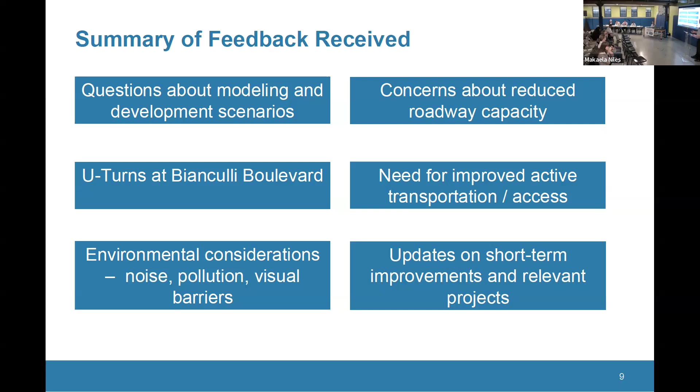Leading with this slide at the beginning instead of at the end is almost like a next step slide. The reason I wanted to show it is that tonight's meeting, so the last meeting, we had a lot of alternatives development. We showed a lot of different concepts and heard a lot of feedback. As part of that feedback, our next step in the study process is to take those alternatives and test them.

That is what we're calling our preliminary transportation operations analysis. We have to look at the alternatives and say, do they function well or not? Our next meeting is going to be the alternatives analysis. We could call it final analysis, but it's definitely going to dig deeper into things people are providing feedback about: environmental, visual, air quality, safety, environmental justice, public health, things like that. Once we're able to set some of our alternatives through the development process, we can continue our analysis.

Bear with me, there's a little bit of a lag. It seems to have possibly frozen, but okay.

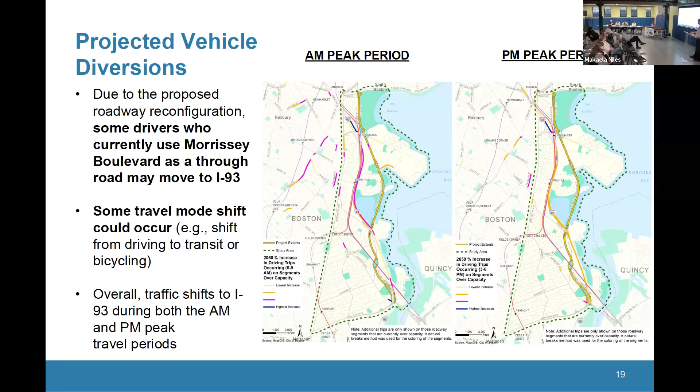Again, back to feedback: what would happen capacity-wise, or diversions. With Morrissey reconfigured to primarily a four-lane cross-section, two north, two south, not at intersections obviously, some of the drivers that currently use Morrissey as a pass-through may move to 93. There's definitely a primarily a shift to 93. There are shifts to other facilities, but the model shows that there would be a major shift back to 93 from Morrissey for drivers. There could definitely be some mode shift based on the numbers we showed on the prior slide with increase in transit mode share, but not unexpectedly, the assumption is they would be diverted back to 93.

So we're getting to the point with all this build model, like, what do we do with it? What's the purpose of it?

So again, once we have this information that comes out of the model, we have to test the alternatives through simulation software.

So we test initially using a software called Synchro. Synchro and Vissim - Synchro is a higher level intersection testing software. It's less data intensive, but we wanted to use it to bring the alternatives we've shown in prior meetings through what we call a fatal flaw analysis. Essentially, operationally, if they don't function well at all, we want to know that.

The synchro testing also allows the traffic engineers to tweak and modify the intersections to see if they could get them to function better, whether it be a longer left turn lane. There are various ways that they can test things.

One thing I want to note is that we've shown a lot of alternatives in the past. At meeting 3.5, we heard a lot of feedback on likes and dislikes. We are showing all of the alternatives we've developed tonight, because we're taking all the feedback from all the meetings into our final analysis. We're testing all the alternatives, showing them so we can show you how they function, because it's very possible that some of your likes and dislikes might be tied to function and operational analysis. We just want to give as much information as possible.

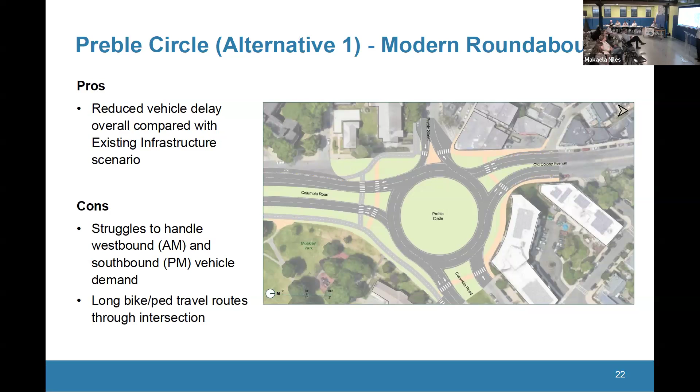One of the pros of this concept is reduced delay compared with the circle that's there now. Some of the cons, though - we found that the westbound Columbia Road and southbound Old Colony Avenue approaches struggled to handle the future volume we were projecting for 2050. Also, because it's still a circle, pedestrians still have long travel routes to get from one side of the intersection to another.

Our second alternative at Preble Circle was to signalize the intersection. This performed more efficiently than the roundabout. There would be crosswalks provided across each leg of the intersection, mostly separated from turning traffic by signal phasing. One exception would be the crosswalk across Preble Street, which would go concurrently with southbound right turns off of Old Colony Avenue, because that turning volume is relatively low.

Another pro of this option compared to the roundabout is that crossing distances would be shorter. It's a much smaller footprint than the roundabout, so it would open up some additional space for active transportation and placemaking opportunities. Some of the cons we found here: the northbound left turn had some delay in the afternoon peak hour, and it may take a couple of cycles to make that movement. Also, the southbound through movement backed up a bit in the PM.

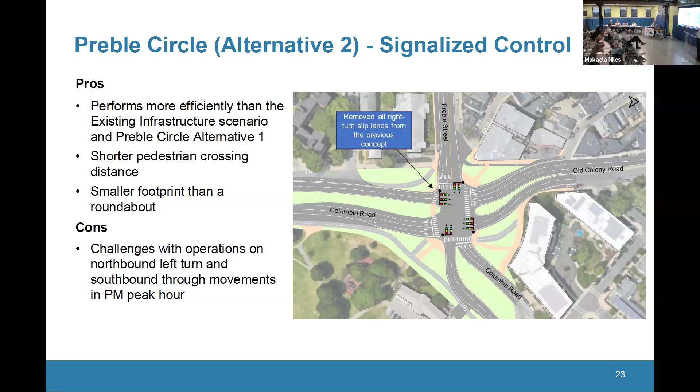Our next location is First Street, which does not exist today. This will be a new roadway proposed as part of the redevelopment of 2 Morrissey Boulevard, connecting from Mount Vernon Street down to Morrissey, between K Circle and Bianculli Boulevard. It would also connect at the entrance opposite the 3575 Morrissey Boulevard development.

The first option we looked at here is keeping the roadway essentially as it is today. The driveways to those developments would be right-in, right-out off of the service roads with no cross connection. So the pro, obviously, is we don't interrupt flow on Morrissey Boulevard—it continues unimpeded. The con: we don't introduce any new east-west pedestrian or vehicular connectivity with this concept.

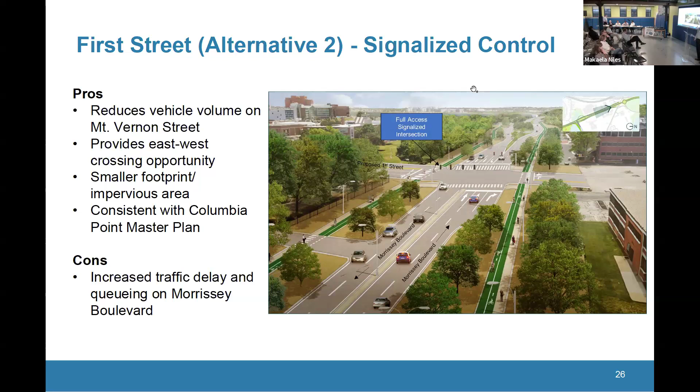The next location is Bianculli Boulevard. The first option we looked at was based on the 2017 DCR concept for the corridor, with some minor tweaks to lane configurations to handle our projected 2050 volumes. This concept would terminate the southbound service road near the South Line building at a signal, and Morrissey Boulevard southbound would continue as the main roadway. The movements—the turn into Bianculli Boulevard and the U-turn that currently happen off the service road—would happen as a U-turn or left turn from Morrissey southbound.

So the biggest change from existing conditions, besides the reduction to two lanes each way on Morrissey: pros here, we found strong overall traffic operations in the peak hours, and we can add pedestrian and bicycle crossings on all legs of the intersection, so really good connectivity. Out of all our alternatives, this had the smallest footprint and the least amount of impervious surface. Cons here, the southbound U-turn movement in the morning was pretty heavy, and it may take a couple of cycles to get through this signal.

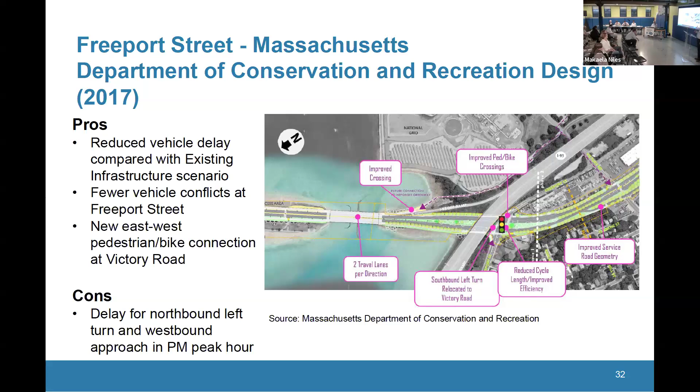Second alternative that we looked at here - we're calling it alternative 1, since it's not the DCR concept - would be another median U-turn concept. This would eliminate all left turns at the Freeport Street intersection and relocate them to new median U-turns to the north and to the south.

Pros for this concept: again, reduced delay compared with the future volumes on the existing corridor, and even fewer vehicle conflicts at Freeport Street compared to the DCR concept, because all left turns would be taken out of the intersection. Cons for this option would be more total delay than the other alternatives, because again, now we're introducing two new signals for each U-turn to the north and south.

The median U-turns themselves require a larger footprint and more impervious surface, so it makes it less environmentally friendly and less friendly for pedestrian and bike connections. They would have to go around those bulb-outs for U-turns. And this would keep the Victory Road intersection essentially as it is now, just a stop control on the service road with no new east-west pedestrian connection at that location.

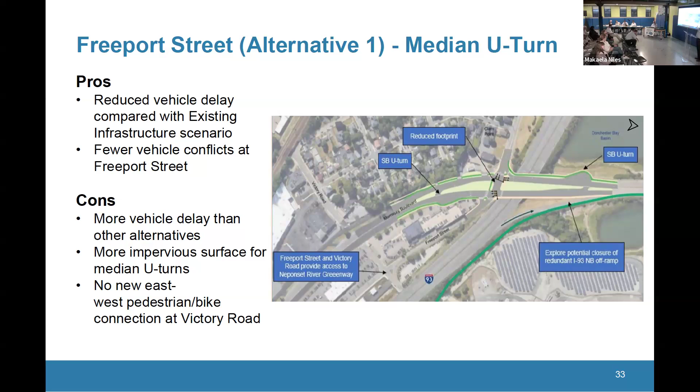The next alternative is using Victory Road and Freeport Street as a quadrant roadway. This is very similar to the DCR concept, except all northbound and southbound left turns are eliminated at the Freeport Street intersection. The southbound left turn is relocated to Victory Road, just like in the DCR concept. For the northbound left turn, you would make a right turn onto Victory Road and then a left onto Freeport Street.

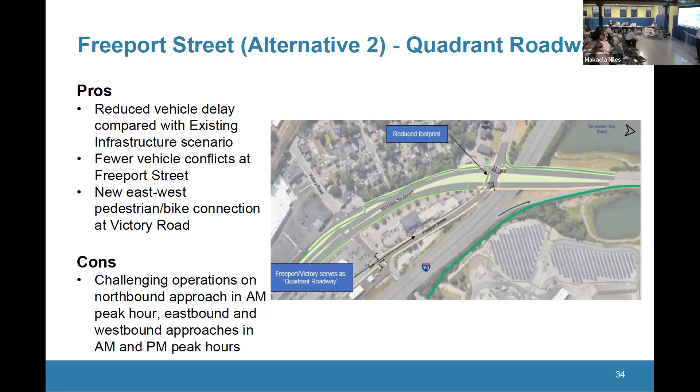Pros for this concept: reduced delay compared with leaving the existing infrastructure in place, and reduced vehicle conflicts at Freeport Street because of the elimination of those left turns. This also provides the east-west crosswalk at Victory Road like the DCR concept. Cons we found: operations were challenging northbound along Morrissey Boulevard in the morning, and the eastbound and westbound Freeport Street approaches had some backups in both the morning and afternoon peak hour.

The final alternative we looked at for Freeport and Victory would be a full signalized intersection at Victory Road, eliminating the southbound service road and connecting Victory Road across Morrissey into the neighborhood. Pros with this concept would be new east-west pedestrian, bicycle, and vehicular connections between Victory Road to the east and the neighborhood. We'd also have new access from I-93 directly to the neighborhood via Victory Road instead of going around via Freeport Street.

We would eliminate the southbound service road, reducing impervious surface and freeing up space for active transportation and placemaking, while reducing conflicts at the Freeport Street intersection since those left turns would be prohibited and movements would occur via Victory Road instead. The cons here: Freeport Street eastbound still has some backups in the PM peak hour, and southbound Morrissey Boulevard also had some challenging operations in the PM peak.

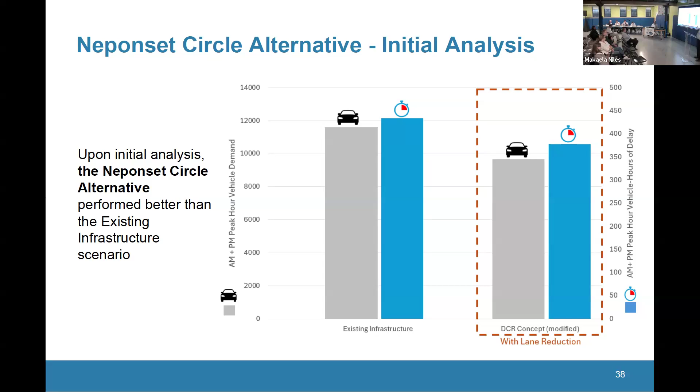Okay, so just to wrap this up, some key takeaways from our analysis. The synchro analysis gave us some insights into all of these concepts and indicated whether there are any fatal flaws. We uncovered pros and cons for each alternative based on operations, as well as geometry and ped-bike connections for each location.

We'd like to get your feedback on these, and then we'll take that back and put this into VISSIM, as Ethan had described, which will show how these locations all interact together as a corridor and also interact with not just vehicular operations, but also with pedestrians, cyclists, and transit.

I'm going to turn it back to Ethan to discuss our next steps. Thank you, Mike.

I'm going to cover a little bit of next steps before we open up the floor to commission discussion as well as public discussion. The reason I want to do this is to better guide the conversation, just to understand what our next steps are, so feedback and comments can be understood in terms of where we're going in our next few meetings.

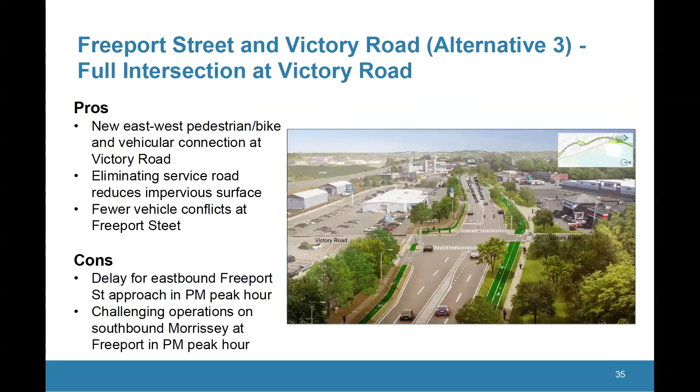So maybe you could get into some of the thought process there, because going northbound to then make a U-turn after Freeport Street, in the afternoon you'd be fighting traffic and never get out, never get to Freeport Street. At the same time, sending all of those left-hand movements at Freeport Street northbound to Victory would just exacerbate what's already an extremely difficult situation for the Clam Point community with cut-through traffic.

I think the DCR analysis in '17 did a lot to alleviate the traffic going in and out of the neighborhood. So those are my main concerns at this time, and I appreciate it.

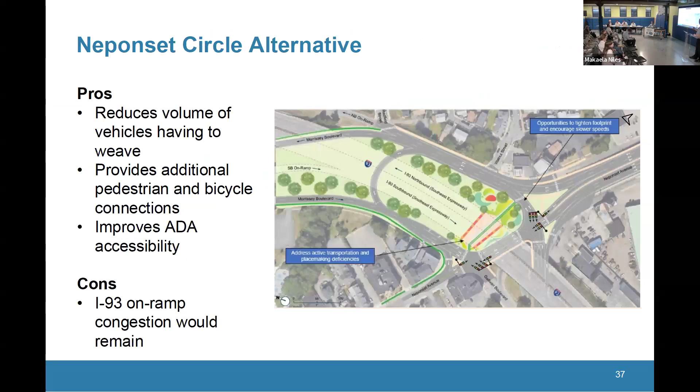In our analysis, we do have the existing infrastructure condition. So that is the future no-build, with those volumes. I'm just saying there were no alternatives that had 3 lanes, different from the existing condition. Correct, we did not run any build alternatives with 3 lanes. We have the existing infrastructure, which has the 3-lane cross section, comparing it to the build with 2 lanes in either direction.

Plus, part of what we did run is that we're also accommodating additional pedestrian walkways and bike lanes and things like that. So those are part of the goals of the project as well. We incorporated all those things, and to do that, you had to eliminate the lanes.

No, I understand. Back to the question of wanting to hear from the community about anyone with the Freeport Street alternatives. We have a floating microphone, so please wait for the microphone. Did you want to go to Frank Baker, who raised his hand? Frank has his hand up, please. Yeah, sorry, I can't see that. Go ahead, Frank. Sorry, I'm just having difficulty, I'm on the phone in the car here. I apologize for not being in person.

One thing about Preble, just to sum up, looking at it, it seems like the signalized solution would be the best. But what I want to talk about is the U-turn. I think when we walked it, it didn't seem there was enough space for the U-turn. I don't know, I'm still kind of weighing my thoughts on whether the U-turn is the right thing to do or not. Not really sure. Still want to work through it.

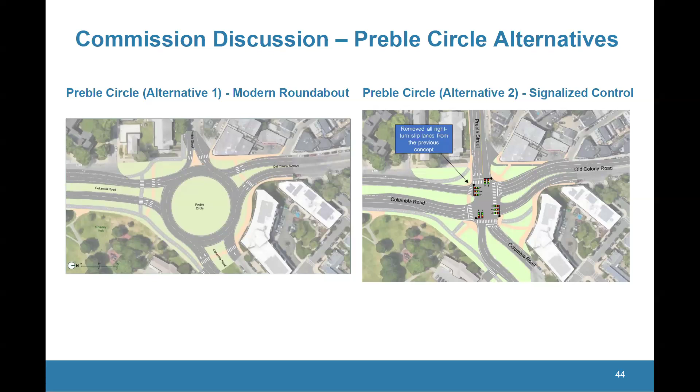We need to prioritize, again, west to east connections. And what I don't see, and it's the most difficult part of it, is the west to east connection at JFK Station. That is an absolute nightmare. We talk a lot about communities that have been adversely affected by government decisions.

That highway was put in 1951 or 1950 when my family was living there, and we were totally cut off by the highway. Not looking to give this commission more work, but how do we make connections down at JFK Station, Columbia Station? How do we get the people on Crescent Ave, which in the next 5 to 10 years are going to have a 200-foot wall at the highway, how are we going to make life better for those communities? I'm trying to lay a little groundwork for what happens in an expanded commission, a larger commission. How do we get west to east in a real way, pushing a baby carriage basically?

I hope those comments made sense.

Yes, most definitely. Part of our future analysis is to look at connectivity and assess the different alternatives based on that.

And Ethan, not to beat a dead horse, but at some point this commission needs to be clued in on where we are on Kosciuszko, because I think that's maybe the conversation where we can talk about the St. Margaret's community, Columbia Road, and the Crescent Ave area. How do we get from Crescent Ave, Columbia Road, St. Margaret's to Carson Beach and those amenities that are coming to us?

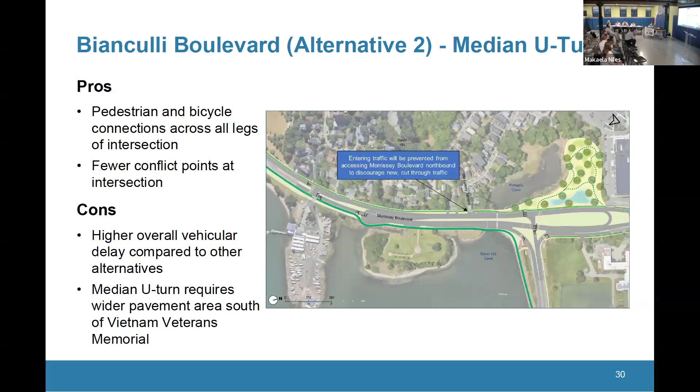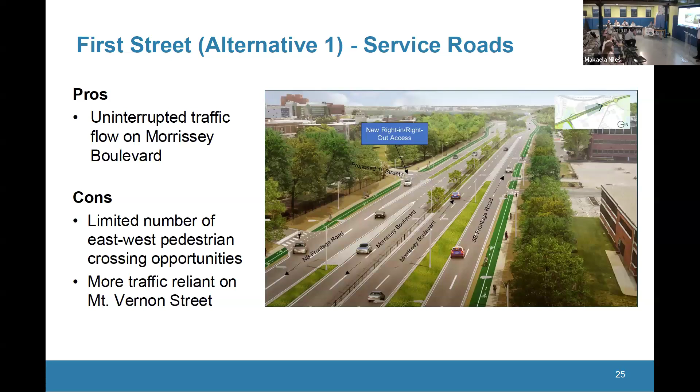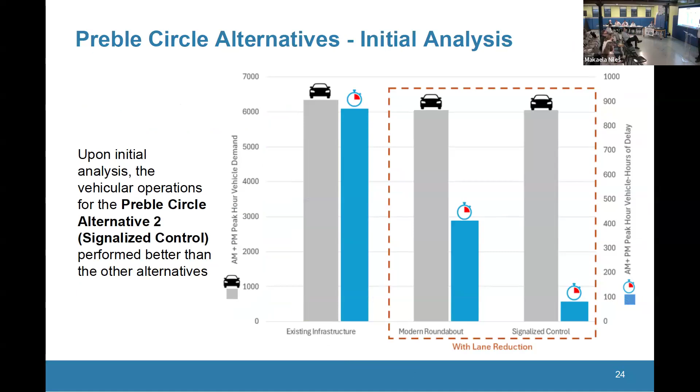I thought I heard that we were going to go from 3 lanes on Morrissey to 2. And it looked to me like in the bar charts that the amount of traffic per lane would actually be higher than the current amount. And it seems to me that if the per-lane amount is higher, all that means is you have to go faster to get through it. So the left side for these charts, the...

Inside there's a smaller box, I guess, of some sort. I can't really tell, 3 bars to the right. Is that on the far left, 3 lanes, and inside the other 2 lanes each? Yeah, the far left is existing infrastructure, so that would be no-build. And then everything within the dotted red line would be 2 lanes.

That's a with lane reduction, and that'll show you the time difference that happens when you reduce to 2 lanes. But I'm talking about volume for a moment. It appears to me that there's more traffic per lane when you go to 2 than 3. And I don't understand how you can make that traffic flow without it being faster or something. I mean, I know you're planning on getting people to decide that Morrissey Boulevard is no longer a cut-through and has to stay on 95 or 93. 93 is the biggest parking lot in New England. And I don't know why people would get on it.

Yeah, so 2 lanes in each direction is what we're proposing along the corridor section. So when you're just driving along the road, at the intersections we're often proposing additional turn lanes to add capacity and improve safety, so we're controlling when the turns are going and managing conflicts of vehicles turning against pedestrians and other vehicles. So a lot of the intersections are not 2 lanes in each direction. That's how we're able to provide that capacity.

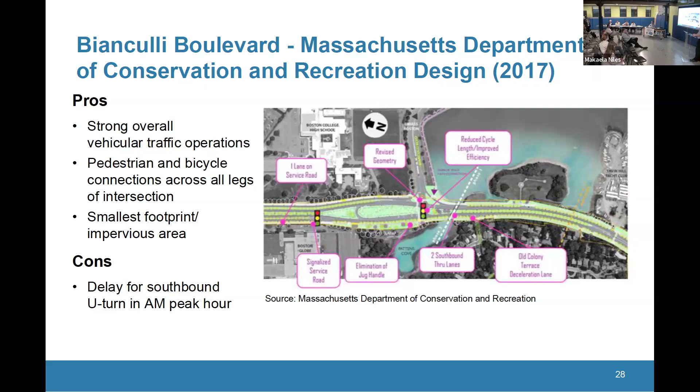The option we're looking at right now is to not have the green tee. In this one, southbound Morrissey would stop when Bianculli Boulevard left turns are going, and also for pedestrian crossings. With the green tee, which is the next slide, that southbound movement would only stop for pedestrian crossings — so there'd still be some gaps, but not as many as with the DCR signalized alternative. Virtually nonstop southbound traffic on Morrissey is an operational advantage, but it's a disadvantage in other ways, both for ped/bike connections and for having those gaps to get in and out of Old Colony.

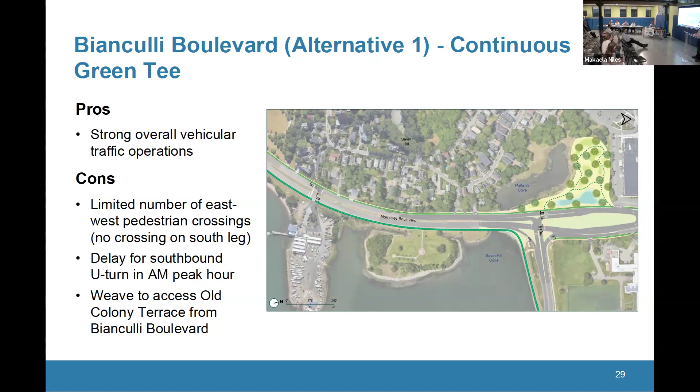Something we definitely like hearing and will consider moving forward with these options. One option is an acceleration/deceleration lane, essentially like an on-ramp, where traffic coming out of Old Colony Terrace would have its own lane that then merges into Morrissey southbound — something that could be looked at in this concept if it's one of the ones that moves forward. It's really about right-of-way and operations, and right-of-way impacts are something we're going to look at as part of our next step as well.

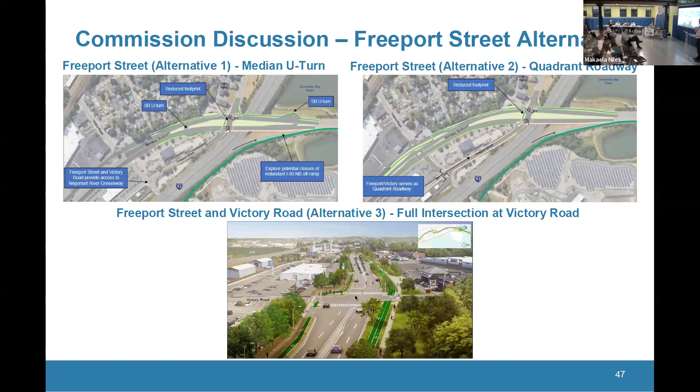Thank you. Good opportunity to say the presentation is actually already online on our website. It went live earlier today. We just want to let everybody know, oftentimes we have to make it accessible and then put it online. It's online right now, so we're trying to get things out to the public sooner. I know it wasn't too far before the meeting, but at least now it's out there now that the meeting has occurred.

On the slide presentation, you have the commission discussion on Bianculli Boulevard, and you just list two alternatives. Is the DCR 2017 also an alternative? Why isn't it listed with the other two in your presentation? That was just an oversight on the graphic, because it's included in the operations analysis. Okay, just want to make sure.

Ethan, I actually have another question, to Selena's previous point about coming out of Old Colony Terrace and taking a right. I think I heard you say you would almost wall off that right in order to prevent someone from, when the U-turn is closer, crossing the two lanes to get that U-turn. You'd have a dedicated walled-off lane, right? Yeah, like a bollard or some kind of physical curb or something to prevent you from cutting over.

But my question is, would that help? I think there's other things that might hurt, but would that help residents coming out of the back of Savin Hill not have to worry about a stoplight to allow them to enter, since they should have no barrier to turning right? That's right. However, they now have to travel Victory Road to go north.

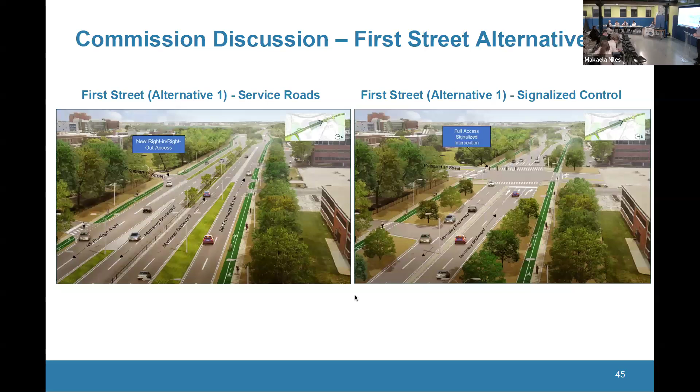Going back to one of your earlier slides, for the 2050 build or no build scenario, yeah, the build and no build.

One of the key objectives is to try and reduce traffic on Morrissey Boulevard long term. And it's great, I think the geometry and the details you're working on are good. Going to work out the details, but I'd like to find out if, on the next level view of this, DOT is considering possibly putting an electric bus line on Morrissey Boulevard to make a connection between JFK, Preble Circle, Gallivan Boulevard, to Dot Ave to Ashmont, which would help local people.

Access the building, the services that we're routinely trying to get to via Morrissey Boulevard. And also, is there any thought on making a ferry, harbor ferry node near JFK, say taking a sliver of land on the north side of Dorchester Bay City and putting a ferry terminal in there, so you could walk from JFK and get to ferry service to Logan Airport or other points in the harbor.

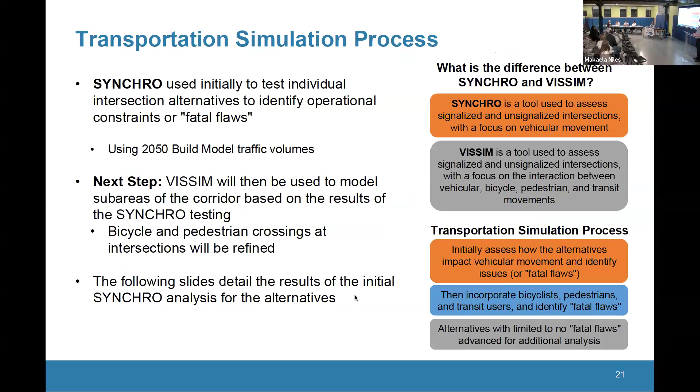And I'm very much on the pro side of making Morrissey less attractive to so many cars, but I still want to see it work well. So that was just my comment on that. And obviously this was the intersection I cared the most about and have been chattering everyone's ears off about at the meetings. So I just wanted to say it actually looks way better when we zoom in on it. Maybe next time we can really get those details out there.

Yeah, thank you, and again, part of this is to flesh out these alternatives on a more corridor basis. So thank you for the comment. If you blow up or get closer looks on certain sections, that would probably be helpful. Understood.

I think given time, do we have any remaining questions on the other sections or general overall questions? We didn't really have a chance to dive into more of the Freeport and Neponset, but do we want to? We do have some online questions. If there are online questions, sure, how many? Four, maybe four or five. Can we maybe read them all? Are they written? They're written. Yeah, why don't we just read them all off and try and rattle off some answers as we go.

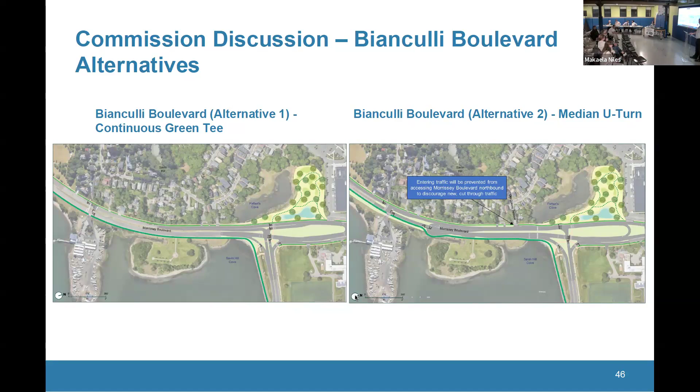Bobanus, I had a question. It seemed like there was a statement about the left turns going north from Freeport Street, that you'd have to go through a couple of cycles, and it made it sound like it would worsen things a little bit, but things already take a couple of cycles. So I don't see how that's really helping things out.

Thank you, understood. Just preparing for the next upcoming meeting.

When does the Morrissey Boulevard climate resiliency project get reviewed for environmental impact? What phase—design or development? So as part of our study, we are going to look at environmental impacts, but it's also in future project development where there will be deeper looks at different environmental impacts. We look at it at a conceptual level now, but we'll bring more to the next meeting. Does that answer your question? Yeah, okay, thank you. You're welcome.